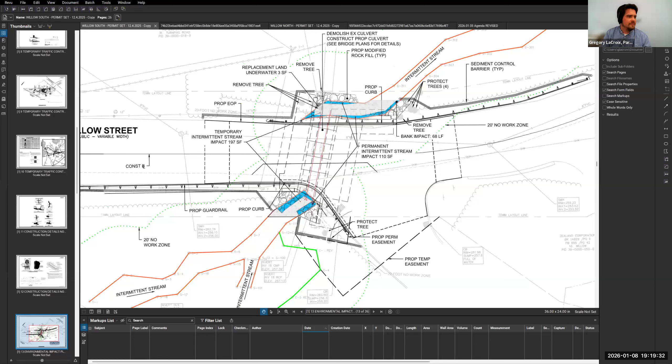So I think you can all see my screen at this point. This is Willow Street South. Just to confirm with the commission, this is the southernmost culvert, a couple hundred feet north of Willow Street's intersection with Turnpike Road, Route 9. If you want to work through this one first and then move on to north, however the commission would like to do it. Either way.

Just as a reminder, we have an intermittent stream flowing through the culvert south to north. We have some BVW off in the southeast quadrant. Initially, we had proposed a replication area. As a result of the initial round of comments, we revised the delineation. It was established that there's no longer any impacts to BVW, and therefore the replication area was removed from the project plan set. There's been no substantial changes to the project since then.

As I mentioned, Lucas just got back to us today, and their comments don't really require any changes to the plans. So if the commission has any comments you'd like to discuss, I can bring up the comment letter and we can go through them. There are quite a bit, so I don't know that it makes sense to go through them one by one, but however you folks would like to do it.

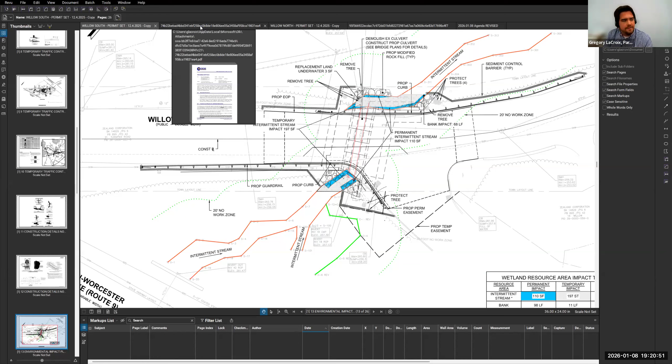I guess I would go ahead. No, I think one of the outstanding ones that might be important was about the section for the openness ratio for the south. Sure, I will scroll through that one. I'm actually going to let Eric speak to our response on that one, but let me bring up the actual comment first.

Their initial comment, you can see above, asked about the openness ratio and clarification on it. The correct calculation that we provided as our response was that the structure has a length of 35 feet and a cross-sectional area of 28.6 square feet, yielding an openness ratio of 0.82, which meets the Massachusetts stream crossing standards.

Again, I'll let Eric speak to the response to the most recent comment from Lucas Environmental. Yep, thanks Greg. So as far as the openness ratio and the square footage discrepancy, the sections we show in our plans are square dimension for the span, so 9 feet, but in reality it's skewed. We don't have the plans up, but if you look at the plans at Willow Street South, it's not perpendicular to the roadway, so the area and span length is actually slightly over 9 feet.

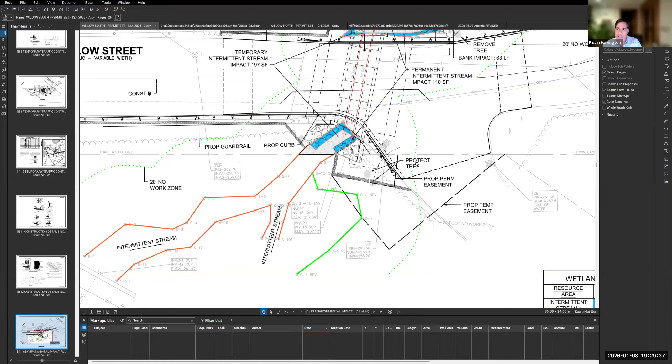Okay, any questions or comments from the commission? I'm still trying to get my head around why the direction of the roadway impacts the openness ratio. If you could explain that a little bit. Yep.

So if you look at - obviously the culvert's going perpendicular to the roadway in general. If it's perfectly perpendicular to that middle of the road, then your span is going to be the same no matter what way you split it. But the way we cut the section in our plans is not exactly perpendicular to the roadway.

You can see there's those short lines that are not quite square with the roadway. That's what we cut, which is 9 feet for span. But if you cut it along that construction baseline through the middle of the road, that distance, because it's not the shortest distance, is slightly larger. So it's like 9 foot 3 inches or 4 inches or something like that.

It's not exactly even. But the openness standard, I thought, was related to the stream, doesn't matter what the road's doing above it. And it looks like it's perpendicular to the stream, so I wonder why you wouldn't just use the normal span. So that is the span.

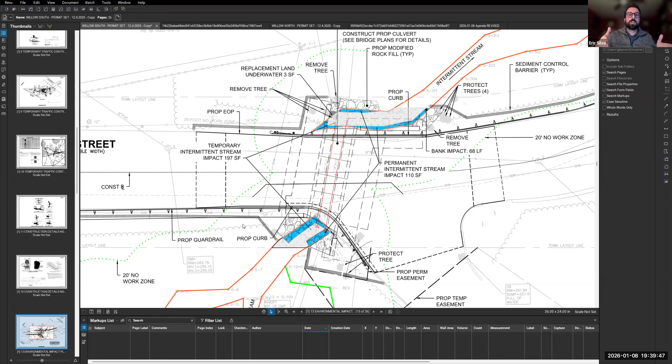Yeah, I'm not a bridge engineer either, but that made sense to me - if it's perpendicular to the stream, that road's going to be shorter than if you skew it. Right, it'd be less pavement, you'd have further travel. Yeah, so if you drew a beam that was 9 feet in this case, and tried to turn that to fit the roadway, it would fall short. You'd need to make it 9 foot, longer, 3 or 4 inches or whatever it is, to get it to fit. So as a more practical matter, it's really about getting light into the culvert area. When you have the shorter run, you don't need as much area to let the light in, whereas if it's skewed, a longer run, you need more openness to get the light in. Makes sense. Yeah, it makes sense.

You got me out of the clouds. Anyways, impromptu openness training for tonight. Yeah, it's good, I learned something. I like learning something every day.

But we'll still make that a finding, Kevin. Good call out.

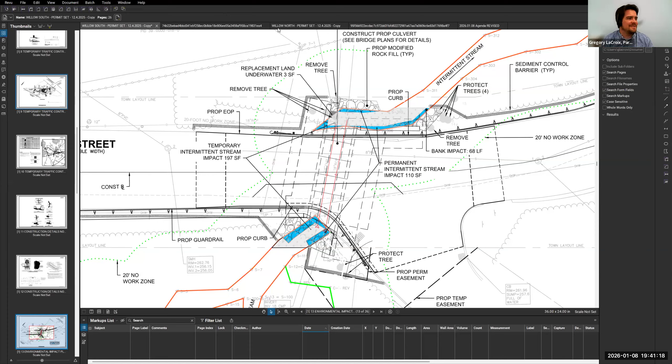All right, I think we have all we need. I think we can close the hearings, we'll close them one at a time. First off was Willow Street South ROW. Wait, have I heard a motion about North yet? Oh, I'm sorry, we didn't - I know it's confusing, I'm sorry. We didn't, okay, on to North. I mean, you guys could approve it, but I thought you'd want to talk about it. That's all. I guess we could close South, but we'll talk about North first.

So here's our same plan set, or environmental impact and wetland impact plan, as I was showing for Willow Street South. Very similar situation as Willow Street South. I don't think I have to run through the timeline again, but we received comments before the last meeting, addressed them, and then the commission had time to review, and Lucas just submitted a second round of comments earlier today, which we're here to talk about. So just as a reminder for this project, this culvert is located immediately south of the Willow Street and Harvest Lane intersection.

This culvert has partially collapsed, and this upstream area is now more like ponded, kind of marshy. The downstream area has received some cobbles and other sediment from the roadway, which we are proposing to remove as part of this plan set.

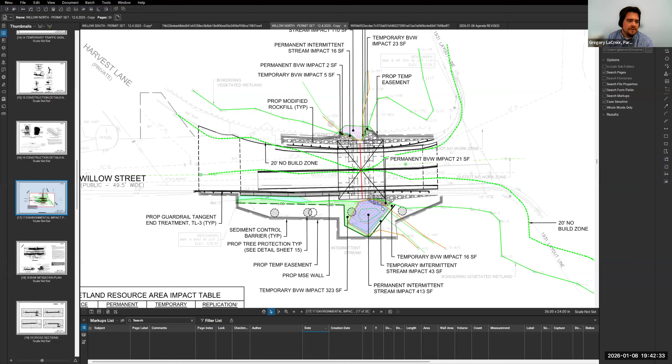But all in all, pretty similar scope of work. This one does have some permanent BVW impacts along the roadway embankment immediately adjacent to the culvert. You can see here, permanent BVW impact of 21 square feet. So we are proposing a 100-foot replication area, and we have a replication plan on the next sheet.

Which is over the 2-to-1 requirement for that as dictated under the bylaw. I think comments are generally also very similar. Correct me if I'm wrong, Joe, but the only additional one that we had for this project was for the replication area. Lucas had

suggested an invasive species management plan for the replication area. We're asking for some leniency on that because of the size of the replication area being only 100 square feet, and also the fact that there will be some monitoring happening per requirements under the WPA and the bylaw, as far as we have to monitor the replication area for 2 years following installation. As part of that, invasive species will be identified and removed. So asking for leniency on the invasive species management plan.

Aside from that, I think the remainder of the comments generally were pretty similar to Willow Street South, but happy to jump into any of them as needed. Joe, anyone you want to call out and run through specifically?

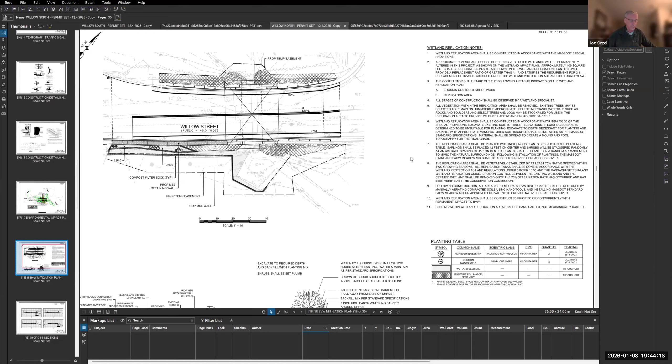Yeah, I think that's correct. Most of the comments were similar. There was not a question on the openness ratio on this one. It looked pretty straightforward. There was a question on the bank width. I think they used one measurement just because of the flooding that was occurring, and typically you have more than one measurement for bank width. Just wanted to point that out and make sure the commission was comfortable with that.

With regard to the invasive species management plan, they had responded that the invasive plants and roots would be disposed of off-site. Would just like a little bit of clarification on how they would be disposed. We don't want those ending up somewhere where they might be reused and spreading invasives to other sites. I think that pretty much covers it for this one.

Yeah, as far as the disposal, it's up to the contractor. It's kind of means and methods, but we do, like Greg mentioned, we'll have a wetland replication area spec that will include the monitoring in the future and removing any invasives, so we can include any requirements for that. If there's any conditions that want to be included, we can include that in the specification too.

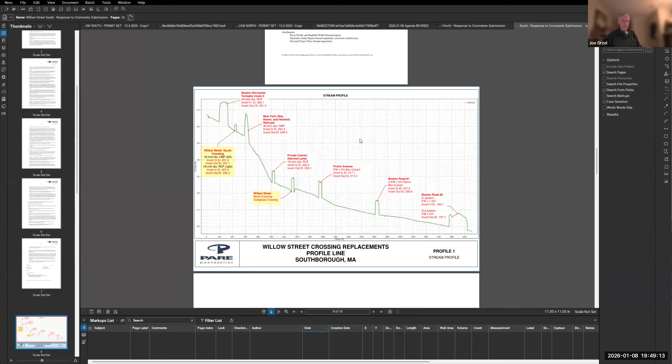It's right at the end of the material. So this is the south site. Okay, yeah, I see what you're saying, Joe. It looks like we have 4. We're showing 4 separate cross sections south of the culvert, and then on the north side of, I believe that's Boston Road, we have 1.

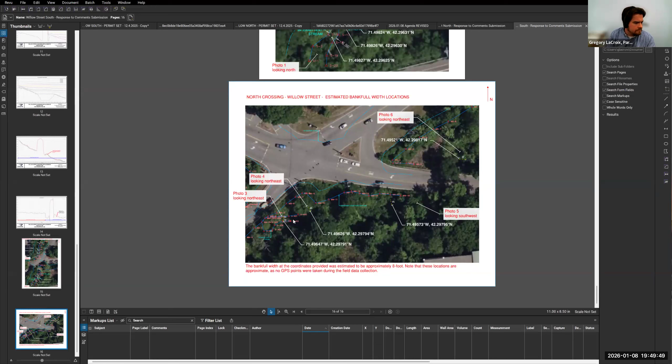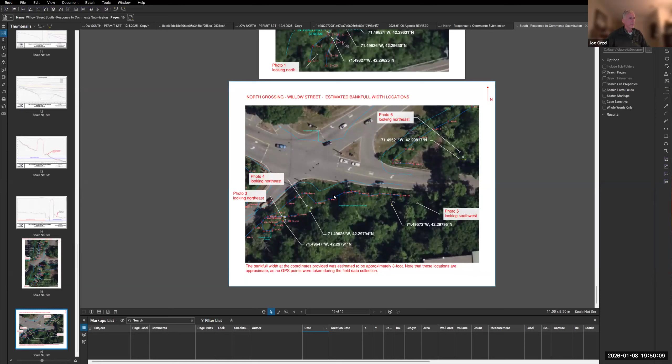Yeah. That addresses my comment. I just hadn't noticed that initially, as it was attached with the south culvert material. So you're just looking for clarification? Yeah, well, the report, the filing stated that it was 1 location. This figure shows 4 locations. So okay, yes, clarification.

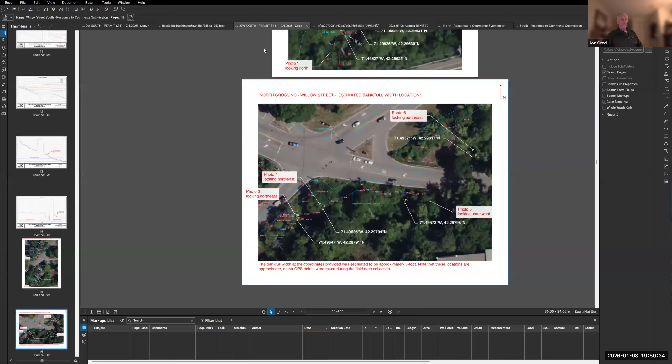Okay. Any comments or questions from the commission members? I can only see Ben nodding sideways, I can't see anybody else. No. Melissa, what did you have for conditions here?

For conditions for north, I had just a finding that the plants and roots taken off site shall be disposed of properly and not reused at another site. Water control plans shall be submitted to the commission and approved prior to the commencement of work or site mobilization activities. A final PE stamped wall design shall be submitted prior to work. The 401 water quality certification submitted. And then the replication area be monitored for at least 2 full growing seasons with reports submitted to the commission.

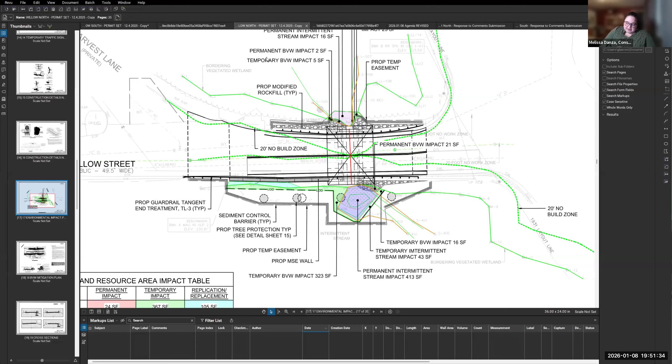By the end of each calendar year, the replication area shall have a minimum of 80% success of growth with indigenous wetlands plant species. Invasive species monitoring and management shall be required during the post-construction monitoring evaluations and included in the monitoring reports. If invasive species are present during monitoring, required corrective actions shall be reported to the commission and immediately addressed. The 80% success, 2 years of monitoring reports, and appropriate invasive species management shall be required prior to the issuance of a certificate of compliance.

Okay, all right, so not hearing any further comments or questions, I think we have what we need. And we can close the hearing since North was first. We'll do North first. Do I hear a motion to close the hearing?

So moved. Do I hear a second? Second. All in favor? Zulik, yes. Barrington, yes. Barber-Iglesky, yes. Smith, yes. Osmano, yes.

All right, and then for Willow Street South, do I hear a motion to close that hearing? So moved. There's a second? Second. All in favor? Zulik, yes. Barrington, yes. Barber-Iglesky, yes. Smith, yes. Osmano, yes.

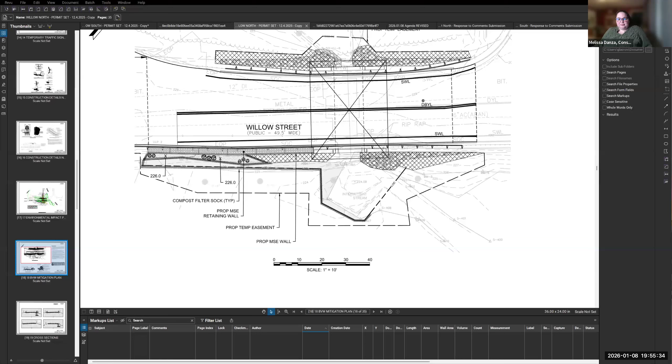All right, I think we're down to farm dump progress restoration. Not much there. I'm going to be sending the potential scope for a contractor to stewardship shortly for their review. There's just been some back and forth about plant differences in what they wanted a contractor to do, and I think stewardship wanted to procure the plants themselves, which might save some money. I'm working that feasibly into a scope someone could put a proposal or bid together on, so I should have that off to stewardship soon so we can be ready for spring to start.

You got anything else? I submitted our annual report, and I put a section in there recognizing that Mark has been on the commission for 35 years. Holy cow, really? Yeah, he did. It's 36 this year, technically. Wow, congratulations.

I can tell you what my wife says: when are you going to get off? Yeah, so I think that's...